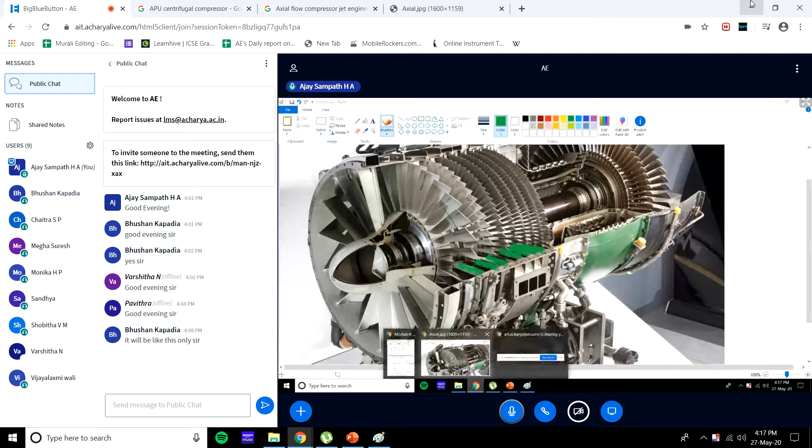So this is your rotor stages and this is your stator stages. Okay, so we'll see the working of it. This will be represented like this. I think I should have taken the image.

Okay, here again, so in this image, this is an isometric view, correct? But if you look at the front view of this image, it would be something like this. This will be your rotor stage, and then your stator stage. No, first one would be your stator stage, and then rotor, and then rotor, and then stator. Okay, we'll just take two for now, and then call it rotor and stator.

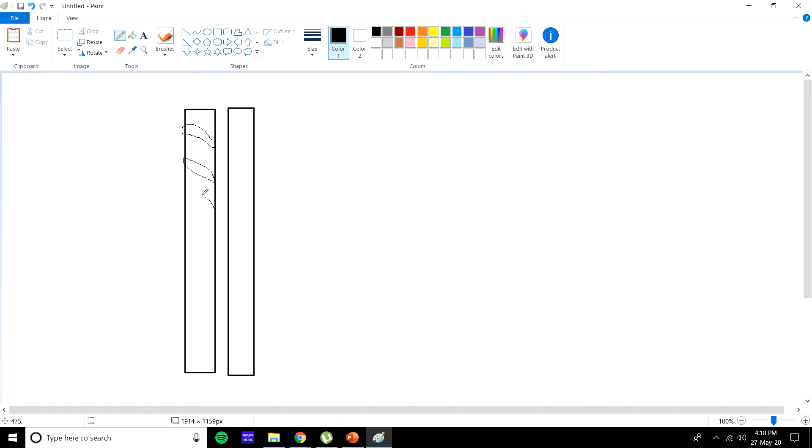And this is one blade. Some random drawing I'll do, just don't take it to be the exact one. Okay, so these are the blades. So blades are nothing but your airfoils, correct? So these are the rotor blades, and correspondingly you'll have your stator blades.

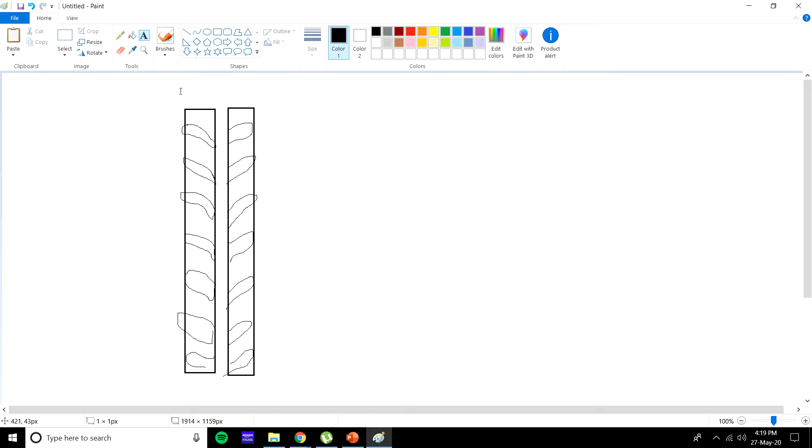So this image, if you look at from the front view, you'll see something like this, correct? So that will be your first stage, will be rotor, and your second stage will be stator. Okay, so rotor meaning it can rotate, and stator is stationary, it is not rotating, correct?

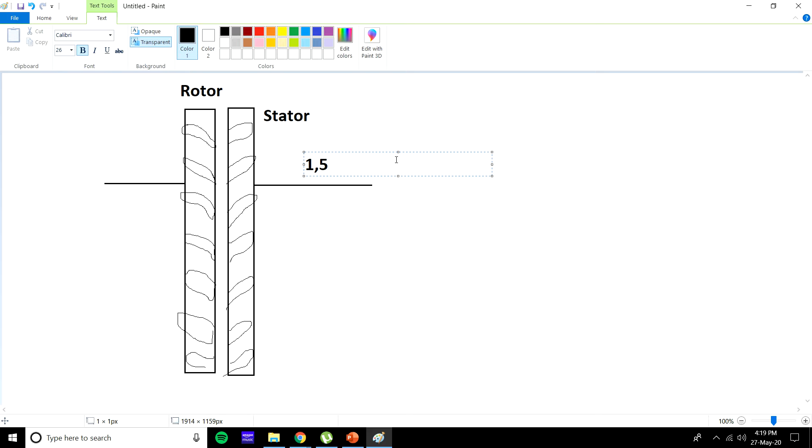So like this, for this one stage, when a gas is coming in this direction, or any fluid is coming in this direction and coming out from here, the maximum compression ratio you can have at these two points is 1.5. Okay, so similarly, if you multiply these stages like this, you can have n number of

casing, and that is why you have this many numbers. So this has got one stator blade and one rotor blade that will encompass as one compressor stage. So 1, 2, 3, 4, 5, 6, 7, 8 compression stages are there in this. Okay, so again 1.5 is quite generic.

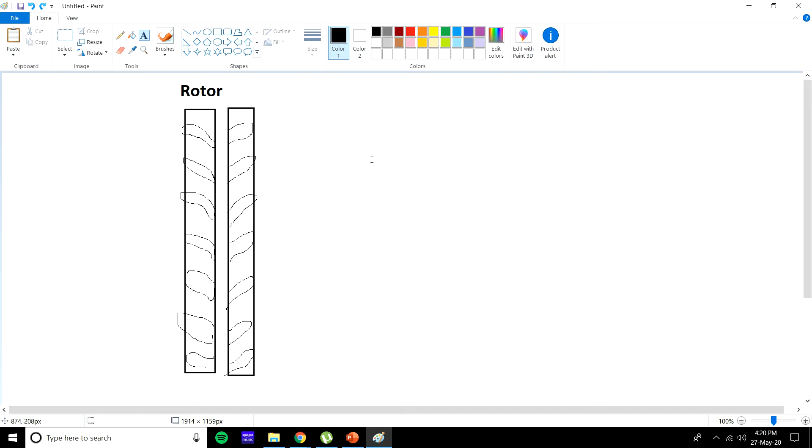I think right now, because of the technological advancement, this number could be more. Okay, but know that it is not much more than the centrifugal compressor, but it can be higher.

Okay, so now what is the idea behind this, or how does it compress, or how does this work? Let us see. So again the same thing what I've said so far. So rotor is attached on the shaft, and stator is actually attached on the engine casing.

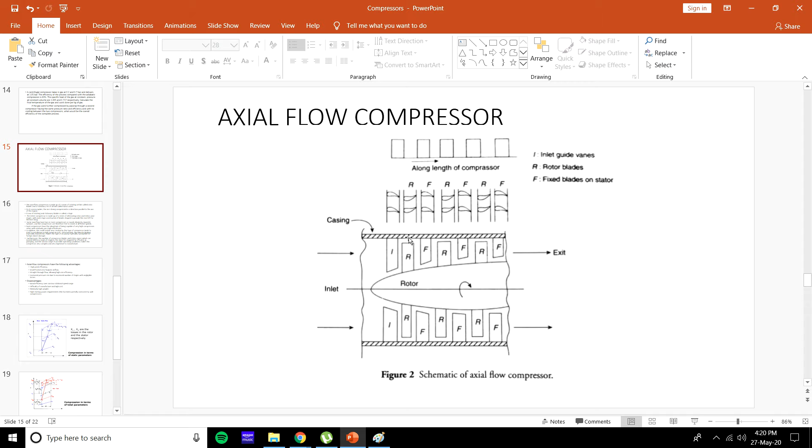Okay, from the front view you'll observe like this, and once you see the stages like this, whenever you see a blade like this from the front view, if you observe it aligned parallelly like this, you call it cascade blading.

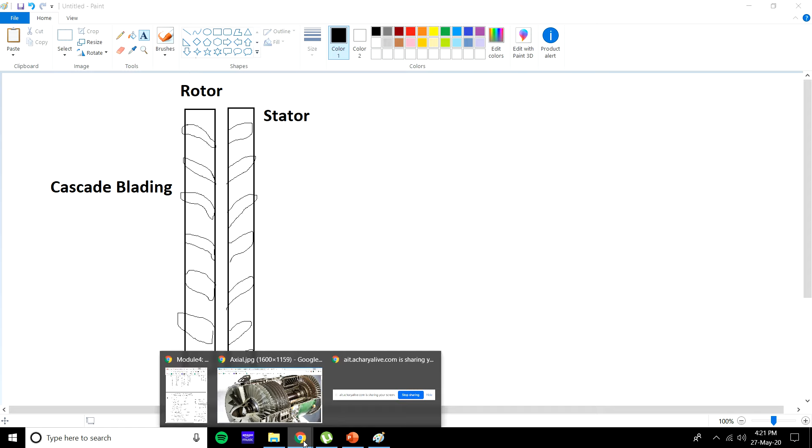Okay, very important word for you to understand. If you see an arrangement of blades in one column, in one such column like this, or one such column like this, you call this a cascade of blades. Okay, so probably if you see this one column, one section of it, if you remove, you call it cascade blading.

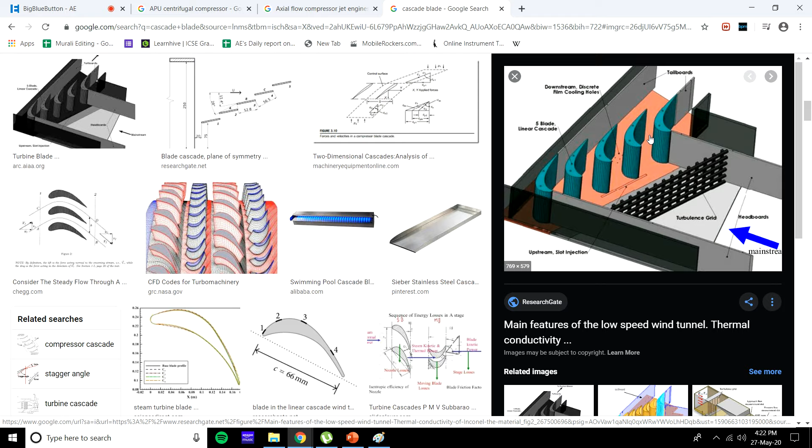This is like cascade blading. Why is this important? This is important because if at all you want to derive something, see, this is cascade blading. So if at all you want to derive something, let us say you want to derive what is the amount of lift that is being generated between these two blades, correct, and the overall lift.

So lift here is nothing but compression. Okay, if it was in air, it would have been giving lift. Since it is encompassed in one body, here it would be compression. So if you want to understand what is the amount of lift that is being generated, you can't calculate everything at once.

So what you do, you open the blade, that is, let us say if this is your circular axis, what you'll do, you'll cut this portion and elongate it. So if you open it, it will be like this. Therefore, now your blades will form a cascade like this.

So once it forms a cascade, you only do analysis on two such blades, this one blade and another blade. So it will be like this. Correct. So I think here, if you want to visualize, it would be something like this.

So something like this, if you open and keep it, you'll get what is known as a cascade. So when you want to analyze the overall effect or overall thrust or compression ratio that is being produced by this particular compressor, what you do is take two successive blades and then apply whatever equations, be it Bernoulli's, be it whatever lift equation or drag equation, whatever you want to do, or the physics behind it, you apply just to these two sections, and then you integrate it throughout the compressor.

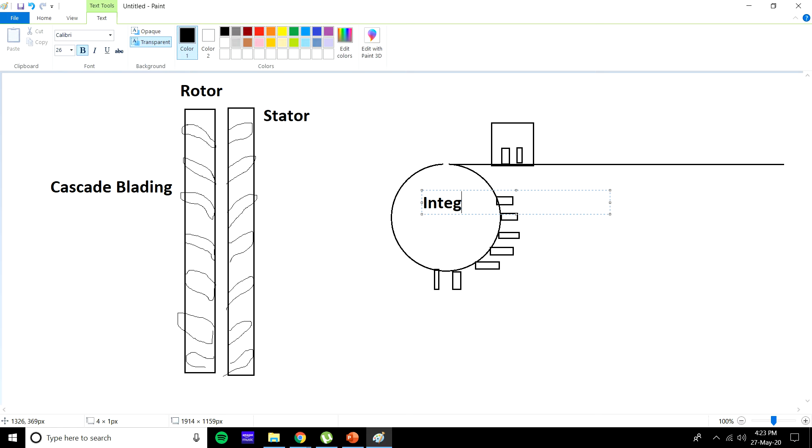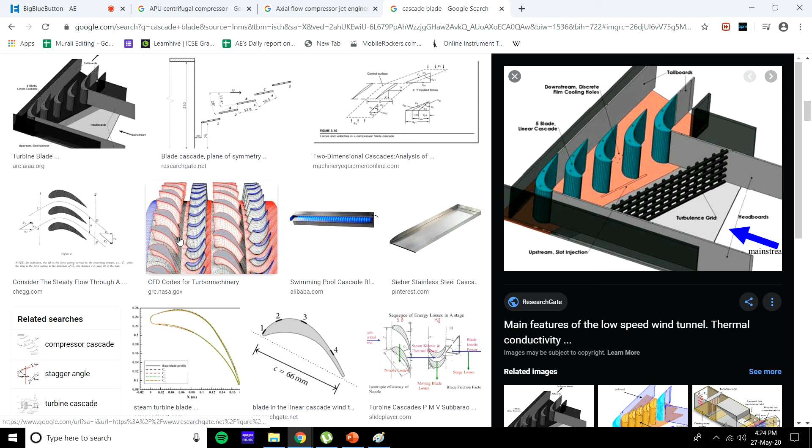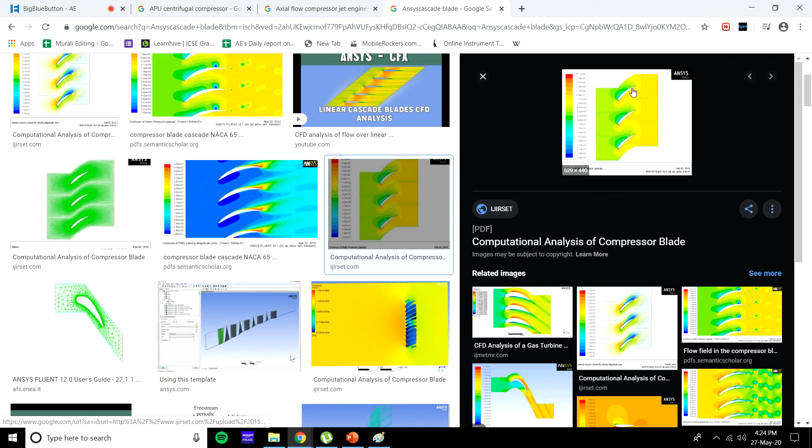So integrate it throughout the compressor. Whenever you're doing any analysis, like ANSYS or fluent analysis, you don't take the whole compressor itself because the calculation time and run time will increase. To avoid that, you just take one cascade. Let me show you, like cascade blading in ANSYS.

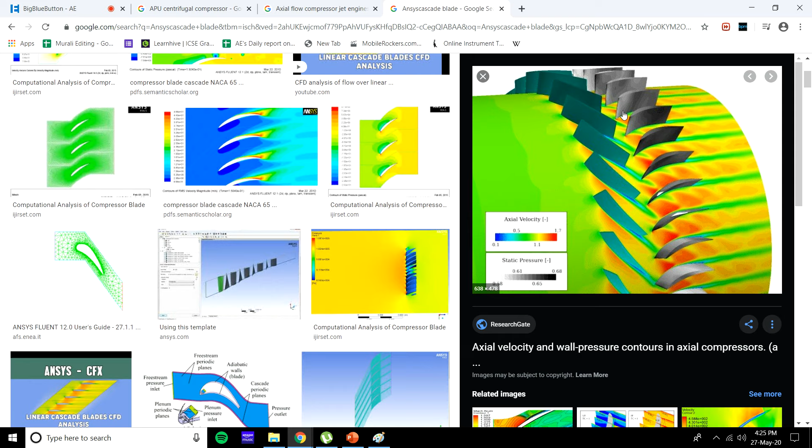So your whole compressor, you just limit it to a small portion and perform your analysis. This is flow analysis, where you can see where the lift is being generated, the velocity contours. Rather than doing this for the whole compressor, which takes a huge amount of time to calculate and obtain results, you take only a small portion of it, call it a cascade, define your geometry, and obtain the results. That's what you know as cascade.

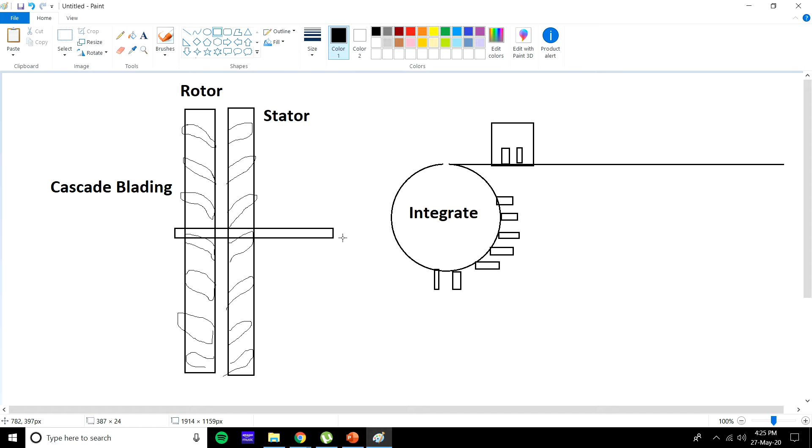Now let's see how exactly the compression is happening. The axial compressor is made up of a series of rotating airfoils such as rotor blades and stationary blades called stator vanes. As its name implies, the air is compressed in a direction parallel to the axis of the engine. The axis of the engine is the axis at which the shaft is located. So if the shaft is in this direction, the compression also takes place in this direction, and therefore you call it an axial compressor.

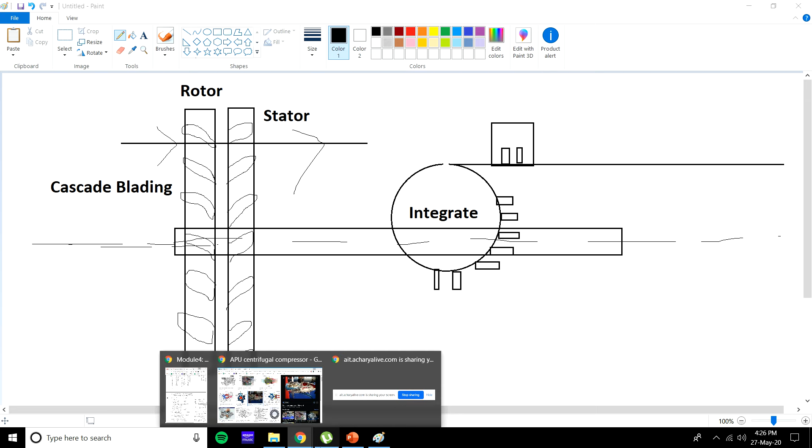This is the axis of the compressor, the central axis of the shaft and the overall engine. So if the compression takes place in this direction, you call it an axial flow compressor. The entire compressor is made up of a series of alternating rotors and stator vanes, which is stage-constructed. Some axial flow compressors have two or more compressors or a spool driven by separate turbines.

I've already discussed many times what a spool is. One set of compressor blades will have one set of turbine blades. So a rotor and stator will have one turbine - you call that one spool. And with multiple sets, you call them different spools. The compressors are therefore free to rotate at different speeds.

So when you have a spool, as we've discussed in class already, if you have another spool, there will be a shaft inside a shaft. Therefore the high speed shaft will rotate at higher speed, and by some gear mechanism, the lower turbine and lower compressor will rotate at different speeds.

In addition, the small frontal area created by this type of compressor leads to its installation in high speed aircraft. Unfortunately, this is the major drawback of axial flow compressors - the delicate blading, especially towards the rear, makes this type of air pump especially susceptible to foreign object damage. Because they rotate at very high speed and the force is axial, if a foreign object, say a small stone, hits the blade, it will be immediately damaged, and that damaged blade will cause a series of damage within the compressor and the engine itself.

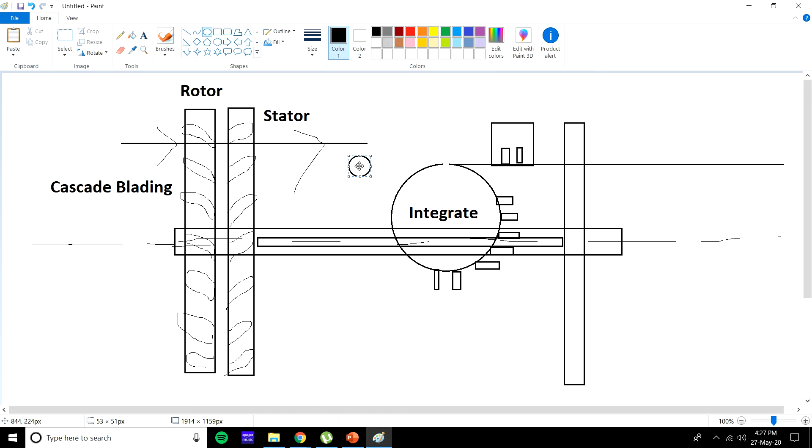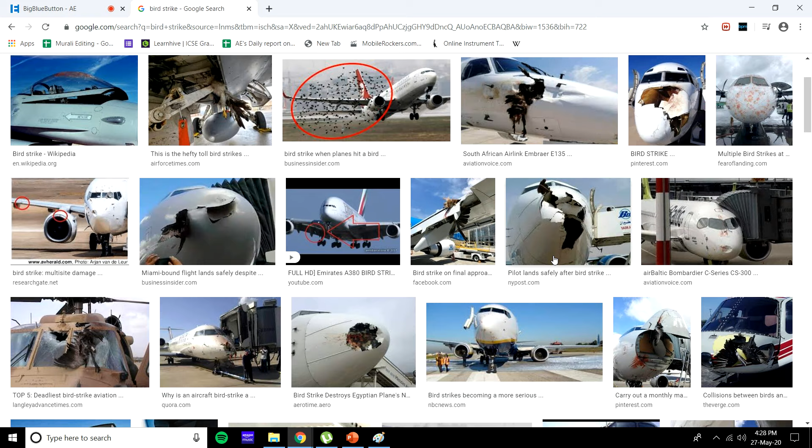Therefore there's a study called bird strike - I think you have heard of it. If you look at these images, it has occurred on some major portions. Importantly, bird strike is most vulnerable for engines. When engine failure occurs because of bird strike, this becomes another field of study especially done for axial flow compressors - birds flying into the engine.

I think there is a very good video also showing this. It's an incredible sight. Danger, literally. They cause... you can see here how the blades have been damaged. This is one of the major drawbacks in an axial flow compressor.

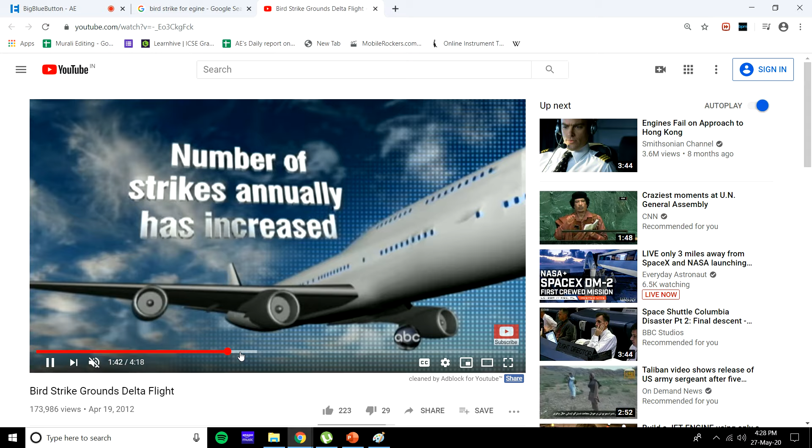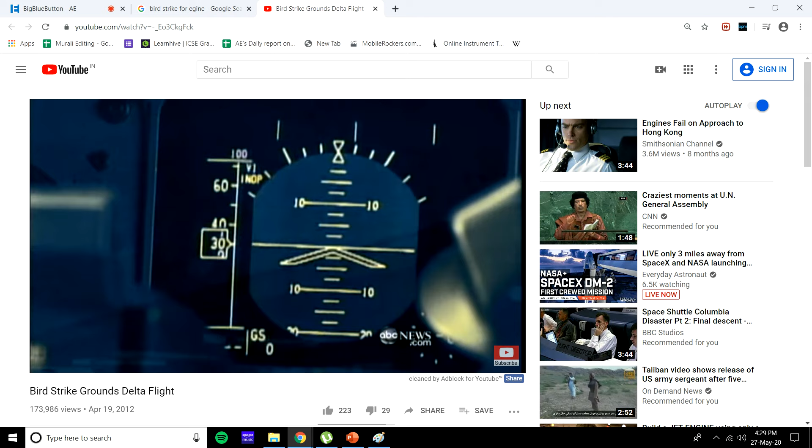While a centrifugal compressor can handle any foreign object, any sand particle or smaller stones going inside the compressor very easily. So if you look at your own hydraulic motor, the water motor you use, it's actually a centrifugal motor. Your water will not just be water - it will contain mud, sand particles, and other things too.

In spite of that, it does not face such severity because the direction it comes is not completely axial. In a centrifugal compressor, it comes axially and exits radially. Because of this configuration, foreign objects that come in will easily tend to move away from the blades rather than in between the blades. But in this case, it is not so, and it has to move through the blades. That is one of the major reasons.

I think one example we can see. These are some of the compilations. Let's see one. Okay, anyways, we'll leave it at that.

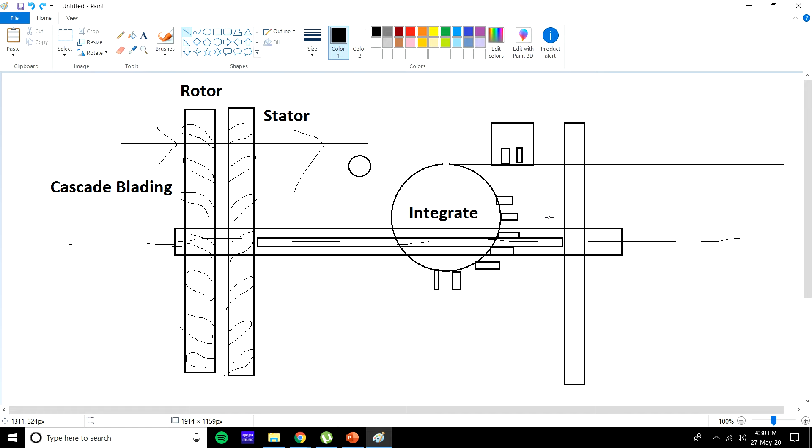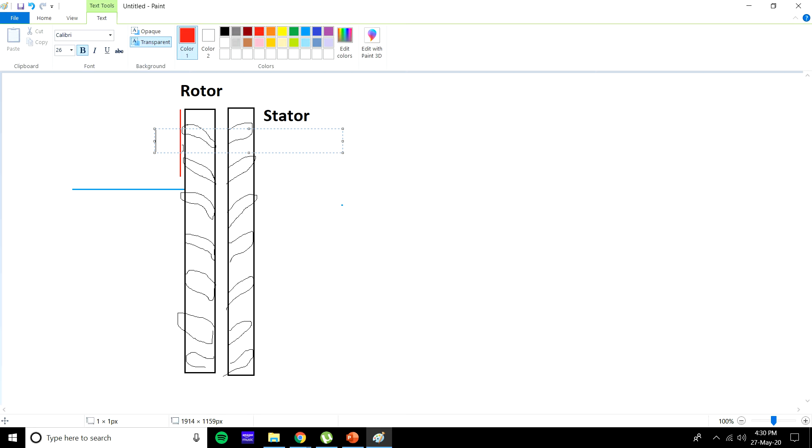So now, how exactly is the compression taking place? What happens is your fluid comes in at some velocity. Once it has come in at some velocity, your blade is moving at a velocity U. Since it is moving at velocity U, there is some work transfer occurring.

Since it is rotating on the stream of air, the rotor will add work, dW. The rotor will add energy to the stream of air. So what will happen is there is an increase in kinetic energy for the stream. This kinetic energy is being added, so once it comes out, it will come out at a much higher velocity.

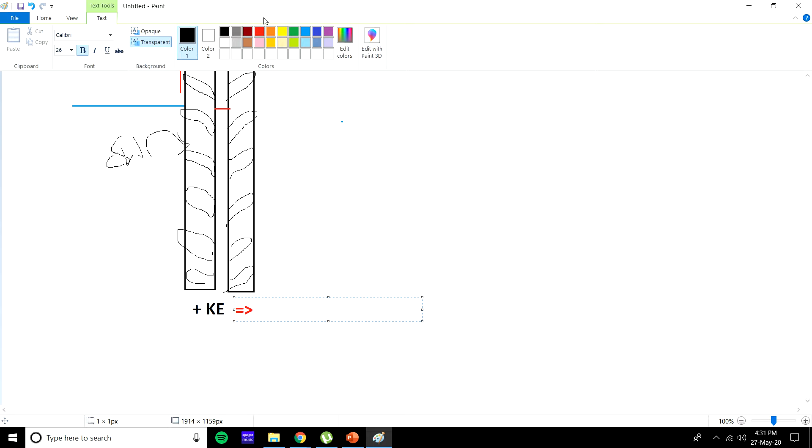But what does a stator do? A stator will convert this kinetic energy to static energy, or static pressure. I think the better word could be pressure head, or head pressure. So the idea is simple: the rotor adds kinetic energy, and the stator converts that kinetic energy into static pressure.

So once it comes out of this, it will now be at a lower velocity but at a higher pressure. The same thing happens in all of the stages, and thereby your pressure keeps increasing.

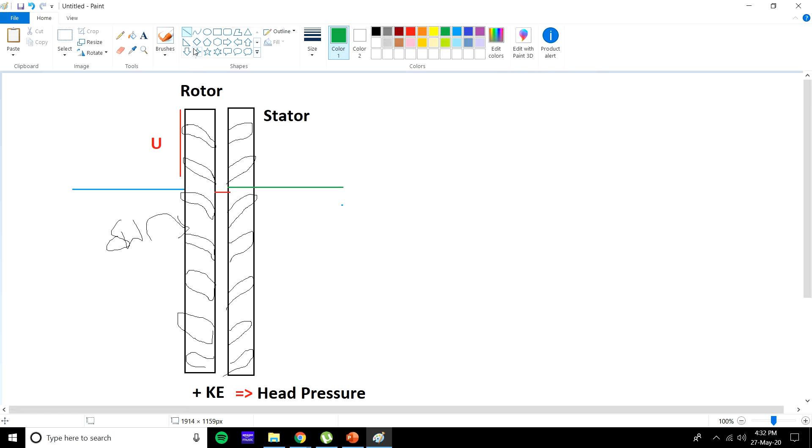So one may question, why just have a stator and rotor only? If I have a rotor stage, just a series of rotors like this, know this: only the rotor is adding work. The stator is not doing anything; it is simply acting like a diffuser, converting the velocity into static head or static pressure.

So if you have a series of rotors like this, you may expect the velocity to increase, and it must increase ideally. But the drawback is that since the rotors are rotating, there is vorticity or vortex. So the flow will not be linear; it will induce huge turbulence within the rotors. If you don't have a stator stage, velocity will increase, but the vorticity or turbulence will be very huge.

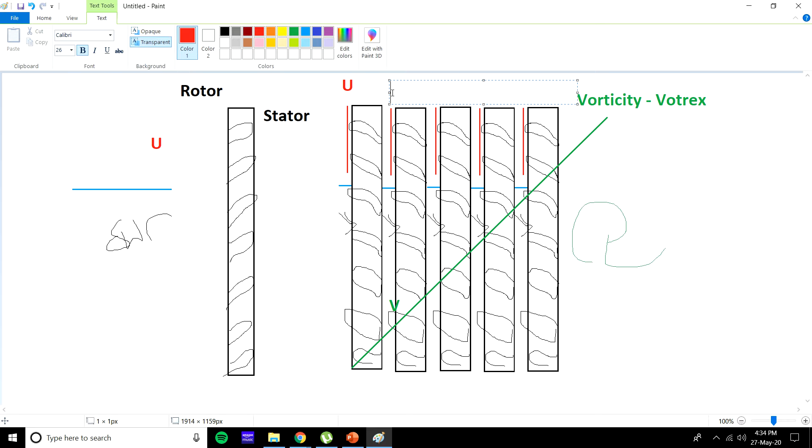And since the velocity is huge now, this is your absolute velocity, correct? So if the green line is your absolute velocity V, and the red line is your velocity of the blade U - let's say U1, U2, and so on. If you have this, given V and U, like I said last time, the third vector between U and V is your relative velocity.

So that relative velocity will be very huge, and controlling that system is also very tough. One second, let me just draw this. So this is for the overall rotor stage - this is your V, this is your U, and this is your relative velocity VR.

So what happens is, even though your absolute velocity is increasing, because of the vorticity and the blade velocity, your VR also increases. If you have VR increasing, that means your V will decrease - your absolute velocity is decreasing and your relative velocity is increasing. If your relative velocity is increasing, that is of no use to you. You have to keep your relative velocity minimum - if this line is only about so much, automatically your green line will increase in its length.

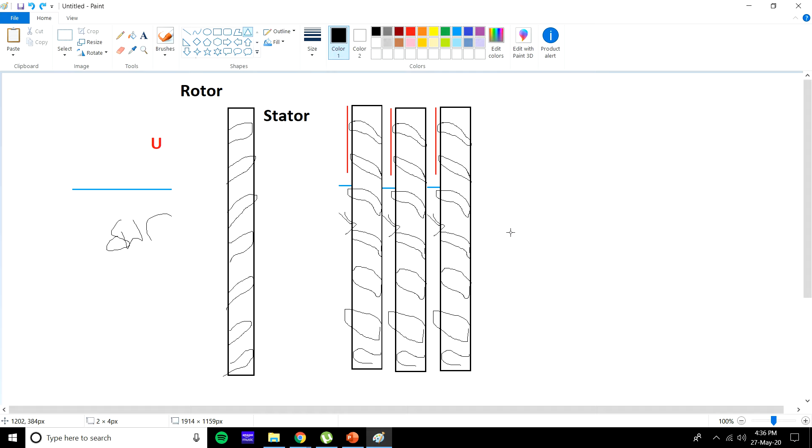I can't show you the variation exactly, but it will be something like this - like a triangle. So if one component is increasing, the other will decrease; that is how it works. So therefore, just by having the rotors, you can't run it, and also the adverse kinetic energy on the blade will have an impact on the overall system. Therefore, it is mandatory to have a rotor and stator system for an axial flow compressor.

So we'll see some of the advantages and disadvantages. Axial flow compressors have the following advantages: high peak efficiency. Compared to your centrifugal compressor, the efficiency of an axial flow compressor is very good, and small frontal area for a given airflow, which we already discussed.

And straight through flow allowing high ram efficiency, since the flow is always axial, unlike your centrifugal, where it enters axially and exits radially. Since that is missing, you'll also make use of ram efficiency. Ram efficiency is striking directly on the blade or striking within the component. So once it is coming inside, ram efficiency is nothing but your external and internal compression. In external compression, because of the geometry of the compressor itself, there is some compression going on other than the compression happening in the blade. So that is ram compression.

And then increased pressure ratio due to increased number of stages with negligible losses. If you take it overall, it is actually very good, but the disadvantage is good efficiency over narrow rotational speed ranges, meaning to have very good efficiency, you'll have to operate it at one particular rotational speed. Unlike your centrifugal compressor which can operate in any other range, it is not the case here. To have perfect maximum efficiency, the rotation of the shaft should be constant.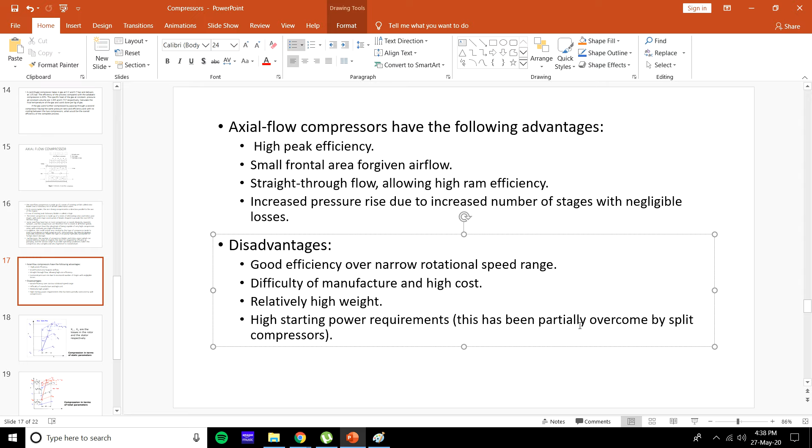High power starting requirements, correct. Since all of the blades should start compressing, to start it you'll have to use some mechanism, some power source which can generate an equal amount of compression, therefore high starting power requirements.

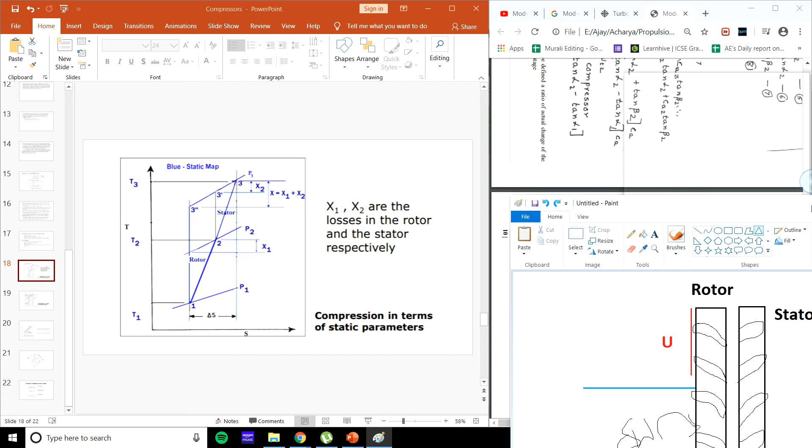Okay, so now we'll see the TS diagram for this. Let this be here, and I'll still draw on your... okay, so first we'll only see...

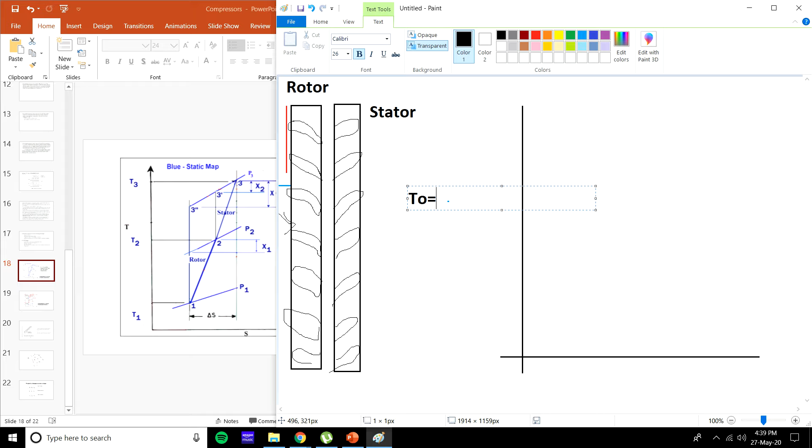The static TS diagram is stating, keeping only static terms, that is your T1, P1. Any equation will follow something called the total. Even in terms of temperature, total temperature or stagnation temperature will be equal to static temperature plus, in case of temperature, the velocity term, absolute velocity, so that will be V squared divided by 2Cp. This will define your temperature. Your pressure will be like this: static pressure plus the dynamic pressure, half rho V squared.

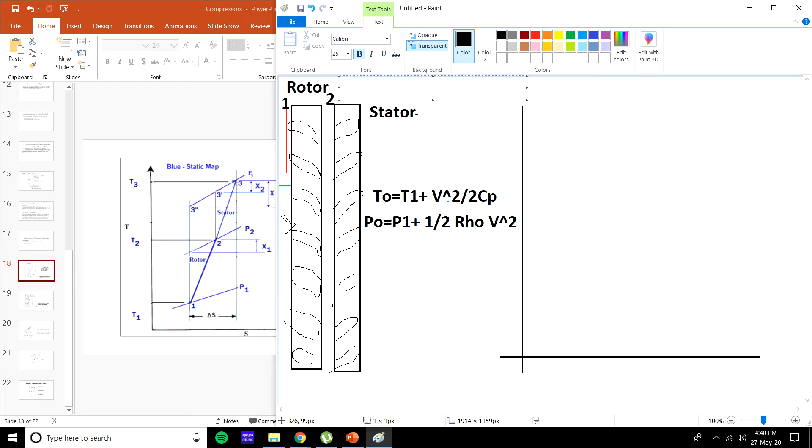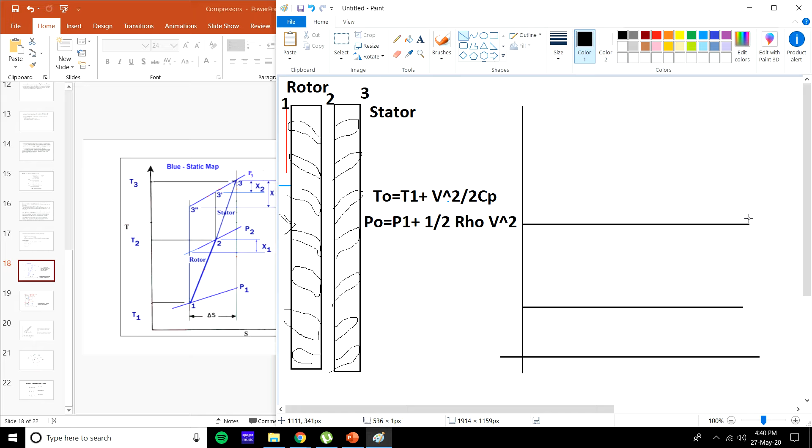Okay, so we'll only plot for static first. So you have 3 stages. Your stage 1 will be here before entering the rotor, stage 2 is here, and stage 3 is here. In all of these 3 stages, correspondingly you'll have 3 temperatures: T1, T2 and T3.

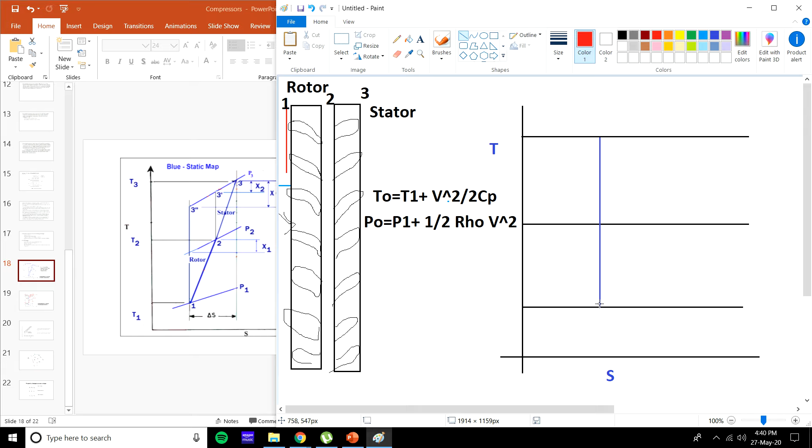So ideal efficiency, ideal compression, isentropic compression will be a very straight line like this from 1 to 2. This is T and this is S. But it is not ideal, therefore actual compression will be like this, from 1 to 2, and then from 2 to 3. The corresponding pressure you measure will be like this: this will be P1, this will be P2, and this will be P3.

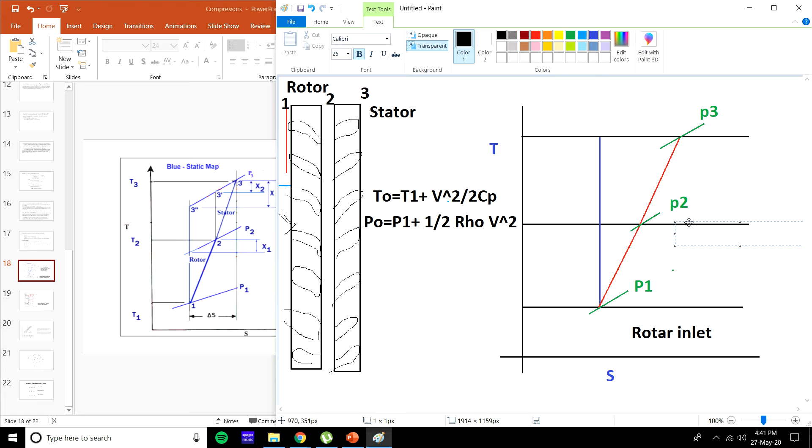So from here, this is rotor inlet, here it is rotor outlet as well as stator inlet, and at this stage you call it stator outlet. This is just your static condition.

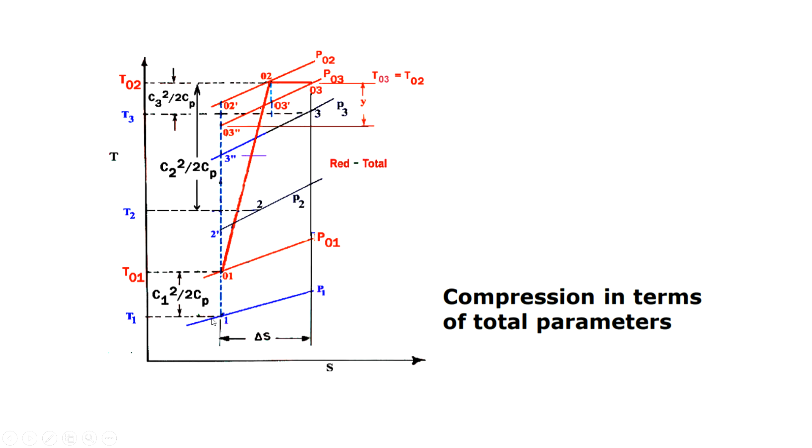With static conditions, if you extend these lines to meet at this point, you'll have your stagnation pressure, and this line you'll have your stagnation pressure here, and the corresponding stagnation pressure. So then we'll see the stagnation pressure itself. If you see, red here is the stagnation point, that is total pressure and total temperature, and blue is your static pressure. So from T1 to T01, that is nothing but here.

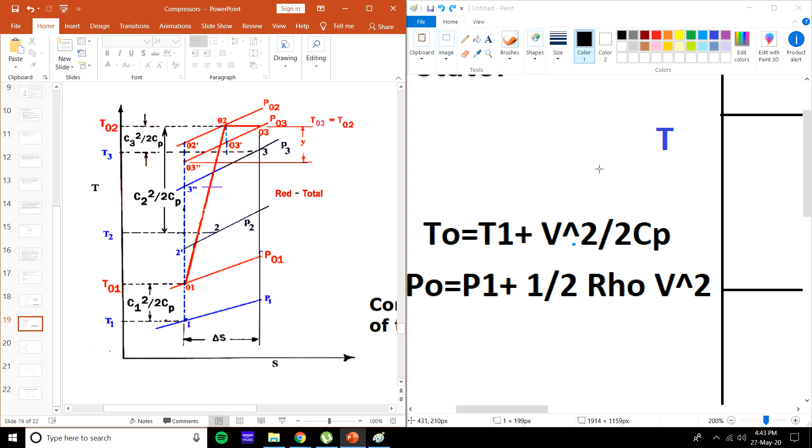From here to the next temperature T02, the overall, so T02. So why T02 and not T03? I'll let you know. So from T01 to T02, from this stage, from here to here, you'll achieve a stagnation pressure temperature of T02, correct? But T02 is equal to T03. The stagnation temperature of T02 and T03 is same. Why? Because there is no heat addition taking place in the stator system.

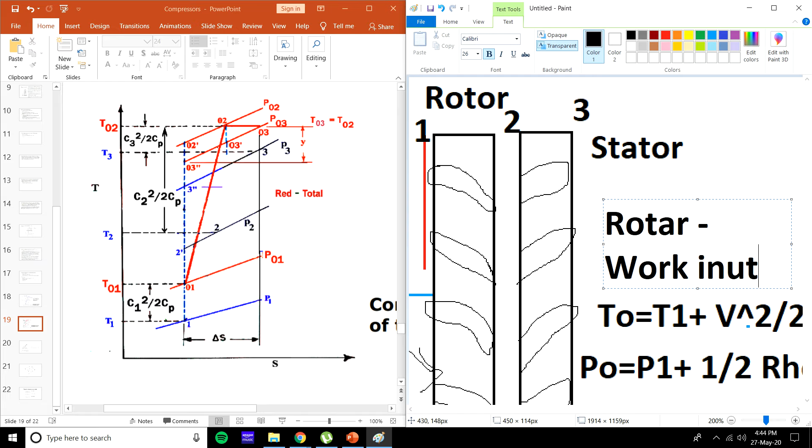Heat addition as in, like I said, you have some amount of work input in your rotor, correct? Rotor has work input. So if rotor is having work input, meaning there is increase in pressure. As a consequence of increase in pressure, there is increase in temperature, but you're not directly adding any heat to it. So therefore it is still adiabatic process and still increasing temperature.

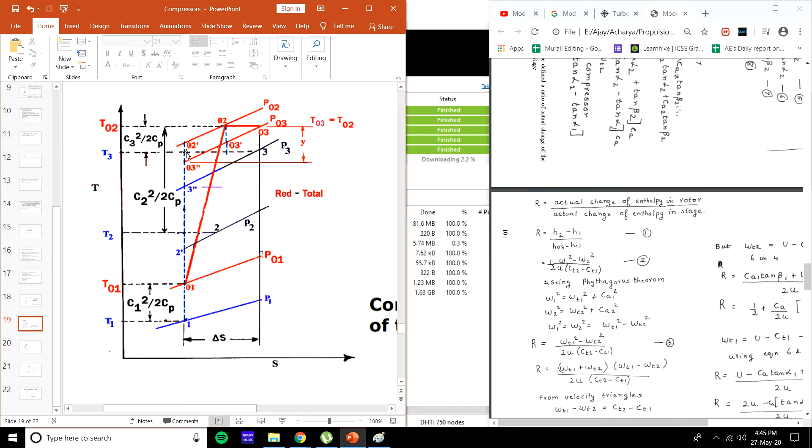But in stator, the process is adiabatic, but you're not adding any work or removing any work. You're just doing the action of diffusion. Therefore, the temperature whatever you achieve at the end of rotor will be the same stagnation temperature at the stator. Will be the same stagnation temperature, but the actual measurable temperature is not the stagnation temperature. It is actually at the exit T2, and furthermore it is T3. So this is just variation of pressure.

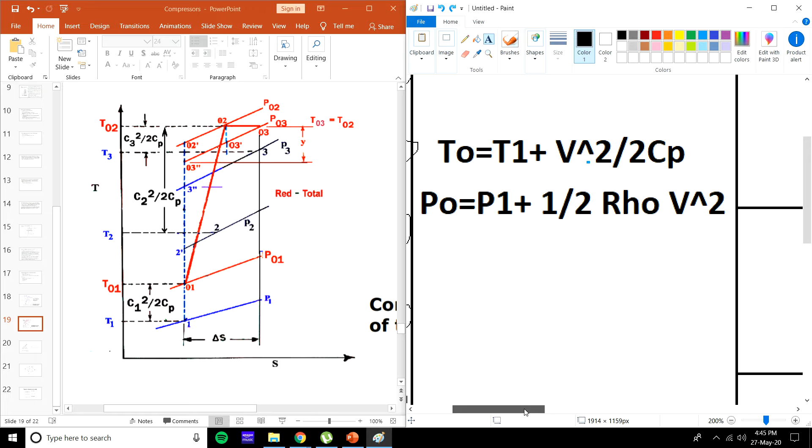Where did that go? Okay, so one thing, for you guys to be able to understand what is actually going on here, if you know these two equations and the significance of P1, T1, and T0 and P0, you can easily understand this graph. Hope you understood. Any doubts?

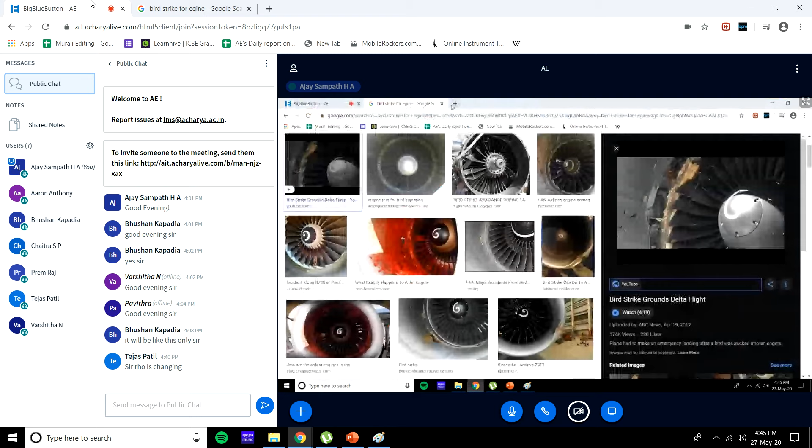So rho is changing. Where, Tejas? No, I mean, like, what do you mean? Absolutely, rho is changing. Oh, you're saying here half rho v square. So what will happen to this? Correct, I think that is your question. So half rho v square.

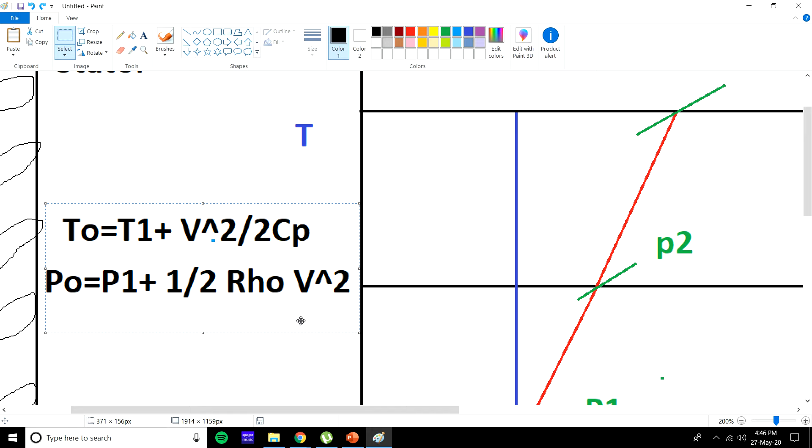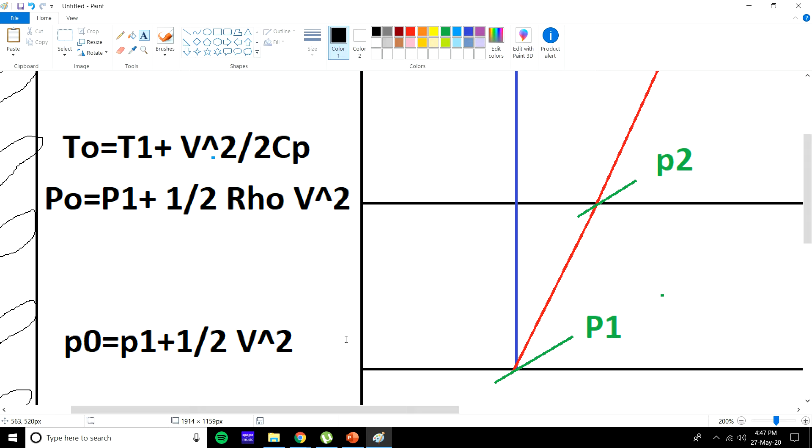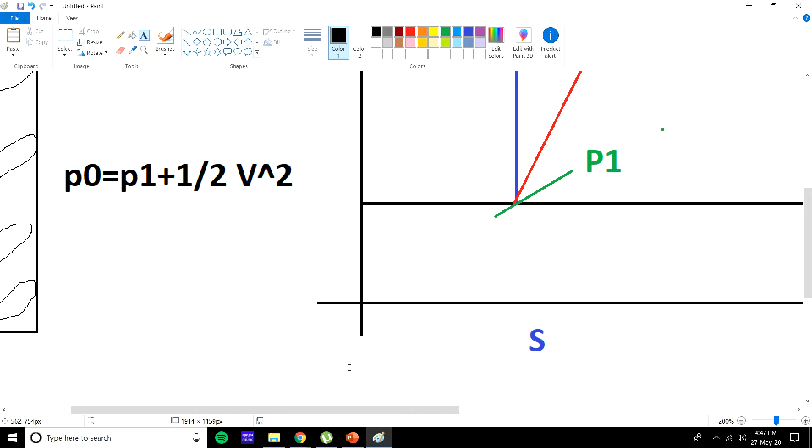Yes, flow is compressible, but the one habit that I have most of the times is that these equations are actually not the direct pressure but specific. So it's not capital P, it is P0 is equal to P1 plus half V square. So one mistake or one habit that I have is not to see it as specific. I have my own reasons, but in all of the cases, even though it is a compressible flow, you take the specific equation. So it is specific pressure. Therefore, the mass quantity will be taken for per unit volume. So when you take that per unit volume, the rho, even though it is compressible, you'll be speaking in terms of specific. So therefore, there is no much change in here.

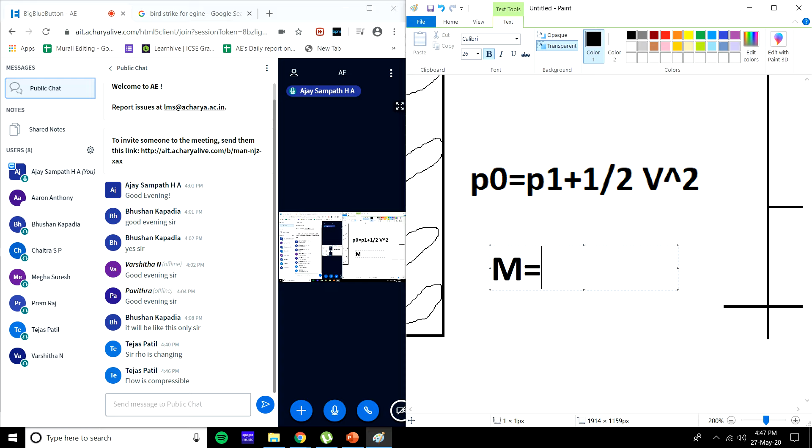But the actual change that happens is when the velocity, or Mach, is crossing Mach 1. So when it is crossing Mach 1, remember your diffuser also. Let us take the case of just considering this to be a diffuser. Even in your diffuser, the equations will follow. I mean, it is agreeable - the general equations what you follow, and the graph variations are agreeable as far as the inlet Mach velocity is less than 1 and outlet Mach velocity which cannot exceed 1. So with this condition, within this limit, your equations or your graphs will follow a common pattern.

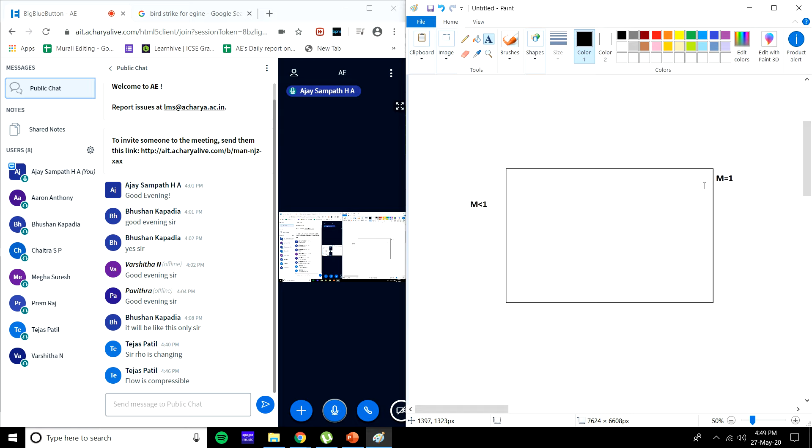Once this limit is crossed, even though the flow is compressible, all other parameters come into picture only when it is crossing Mach 1. So even though the flow is compressible, you'll be speaking in terms of specific pressure or specific temperature, which you don't dig around, but it is understood - you're reading it in terms of specific. So when you take it in terms of specific, your mass term will be divided out of it. Therefore, density will not play a crucial role up until the point where Mach is greater than 1. I hope you understood what I was trying to tell.

Okay, so this is specific. Therefore, rho is not there when you are doing it for specific.

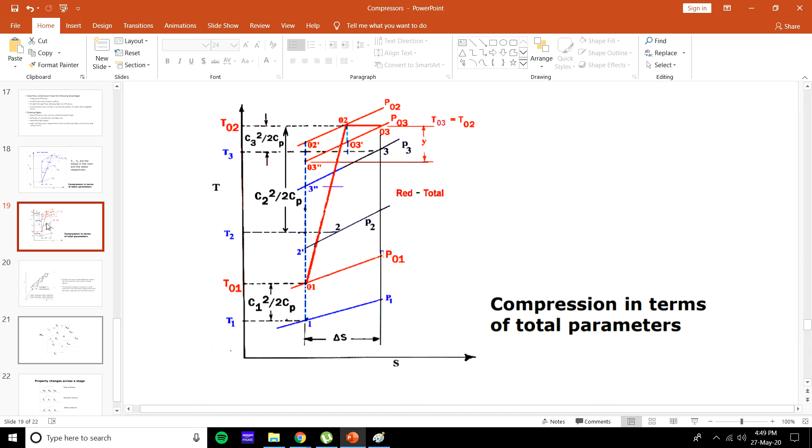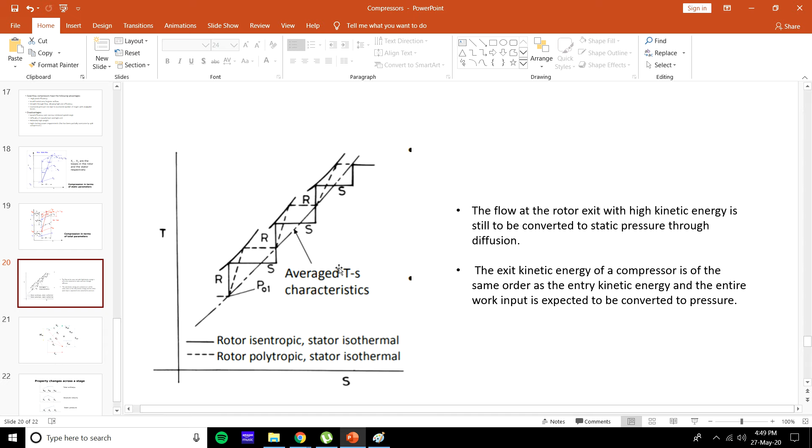Now we'll see what is happening to the successive stages. This is for just one stage while it is passing from rotor to stator. So for one stage we have drawn the TS diagram, but if you look for multiple stages, ideally speaking, it is all isentropic.

A thick line is an isentropic line. So the first stage in the rotor is isentropic, therefore it is a straight line, and then this is acting like a diffuser, so therefore no increase in temperature but increase in entropy. Then isentropic again, therefore increase in temperature, and in the stator stage, no heat addition and no temperature change. So therefore temperature is zero, but entropy is not zero. This is how it goes on the multiple stage level.

But since it is not an ideal case, the rotor will follow a polytropic line, an adiabatic process. Rather than polytropic, you can just say it's an adiabatic process. So in an adiabatic process, the line will be slanted, but the stator is still isothermal, so it will go like this. The increase in temperature corresponds to the increase in pressure. So therefore in this graph you can easily plot it.

So if you draw these tangents, what they are trying to draw are the pressure points they are trying to mark. So in all of these cases, if you take an average temperature line, this line is an average temperature characteristic. An average temperature across the compressor in any of the different stages can be known if you draw an average line.

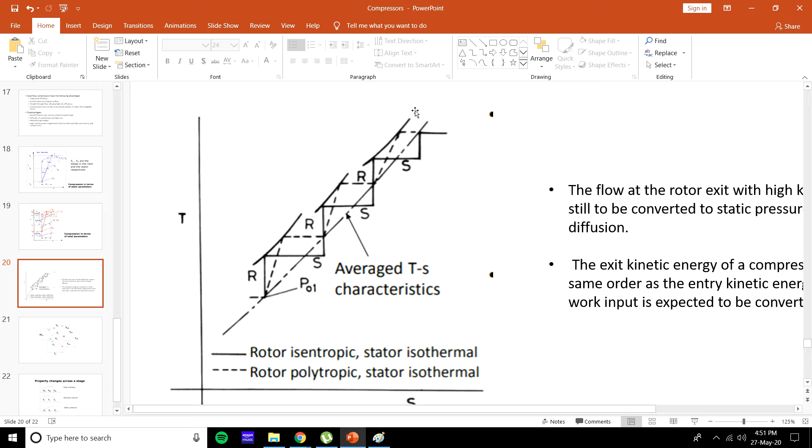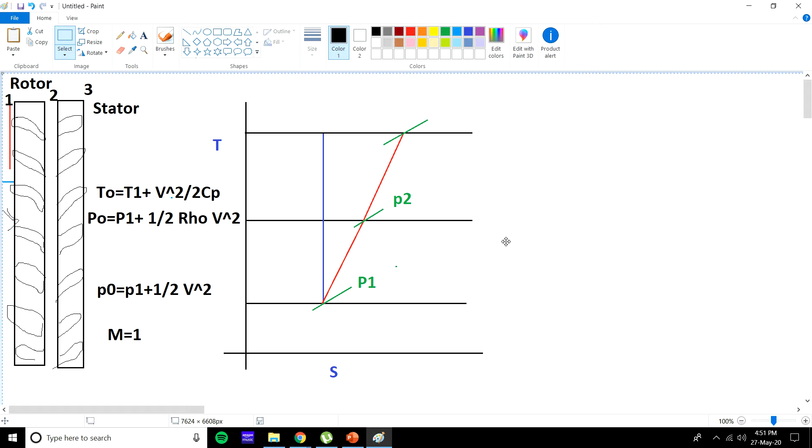Now we'll get into the velocity triangle. I'll draw it here. So we'll take the angle at which your absolute velocity is first. For this case, for your understanding, I'll just draw it like this. So your air will enter the system with an absolute velocity v1.

I'll draw the angle later on, and then it will meet your u, correct? So air is entering the system with v1 at a certain angle alpha, and then it will face the rotor velocity u. There is no u1 and u2 here because at inlet and outlet it is the same velocity. Why? Because the blade is not increasing in length, it is the same, on a common cascade, so therefore u1 and u2 on both sides will still be the same, so you can only represent it as u.

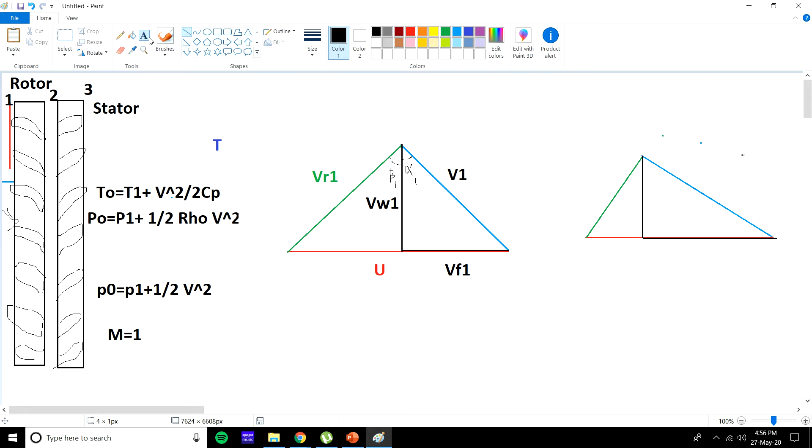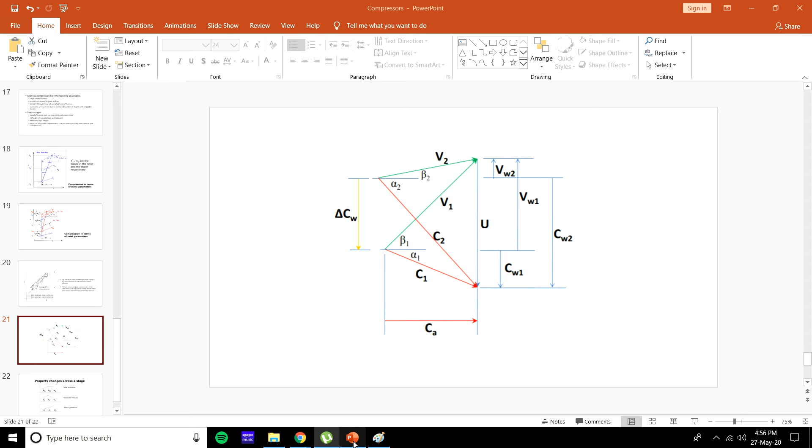So if you actually look at this, they both look somewhat similar, and also your u is the same, u1 equals u2 at inlet and outlet is u. So if you combine both of these in a single graph, you'll get something like this. Since u is the same, I'll just try to replicate it here, but the direction of velocities is different, the way it is entering and the way it is going out is different. So if I draw it in one single triangle, this is your u, I'll just take a bit thicker line.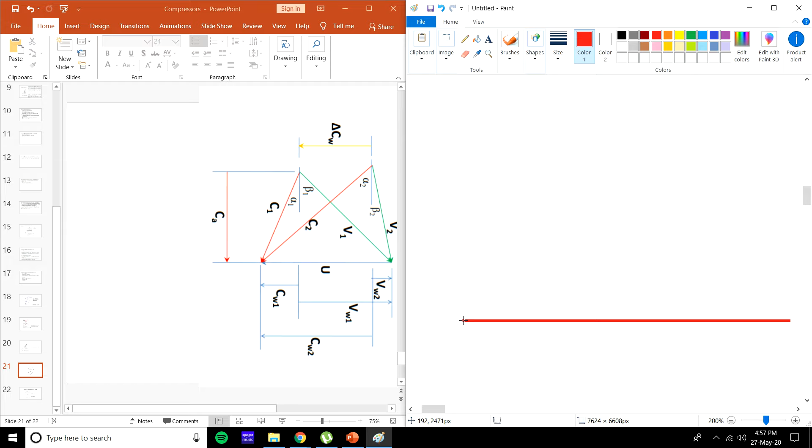So if this is your u, firstly you should have your absolute velocity. So with respect to this picture, absolute velocity c1 or v1 will be like this, and the other absolute velocity, c2, is here. And the relative velocity to these two is like this, here and here.

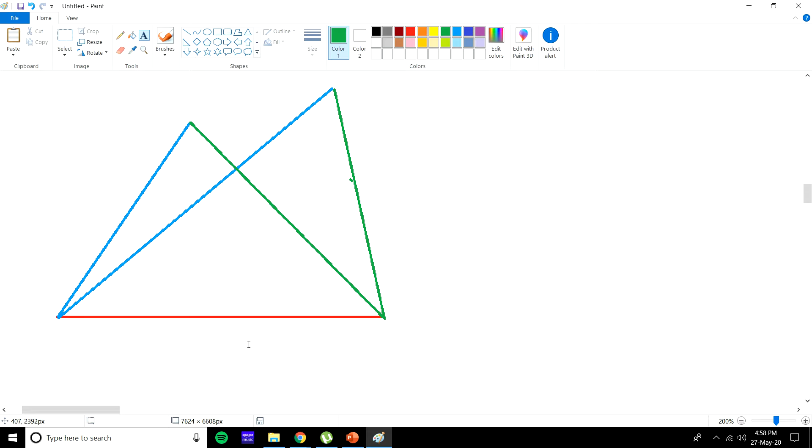So this is your combination of both inlet and outlet triangles. This will be your u, which is in red, and this will be your c1, that is your v1, and the blue line is your v2. This is your vr1, and this is your vr2.

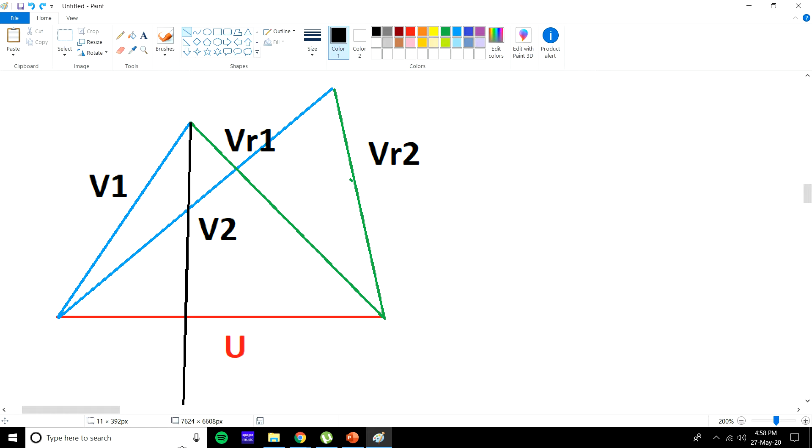So once you have drawn this line, you need not draw your tangential and radial velocity, because you'll have too much to take care of. So what you do, you just draw one line here, and two lines here, and here.

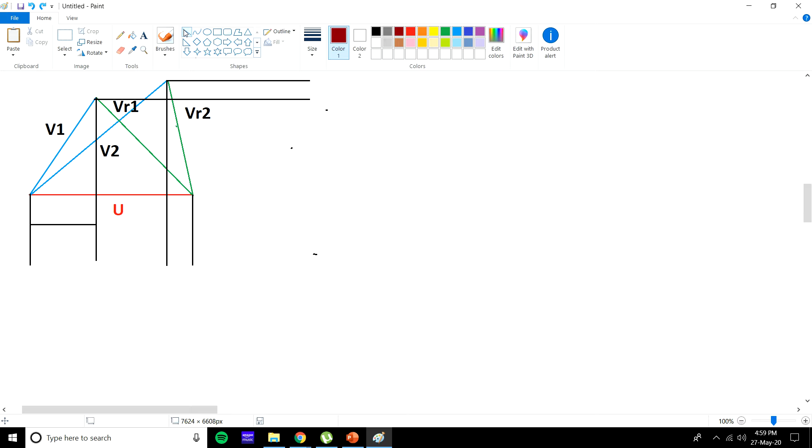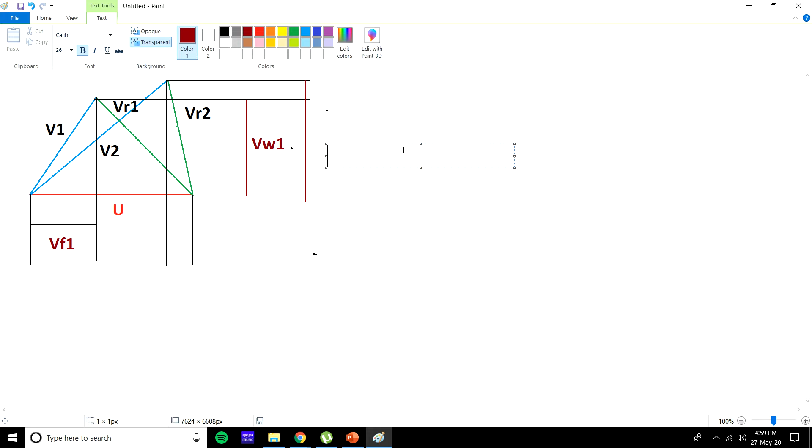So from this point to this point is your VF1, because V1 and VF1, and this height from here to here is your VW1, and similarly this height to this height is your VW2, and correspondingly from here to here is your VF2.

If it is confusing, you can separate them out like how I did here in the first place. Since U is common, you're just trying to draw it on the same thing to save time, or else you can just leave it at this point and then you know what is the horizontal length. This is most important from your turbomachine's point of view, to find the other angles.

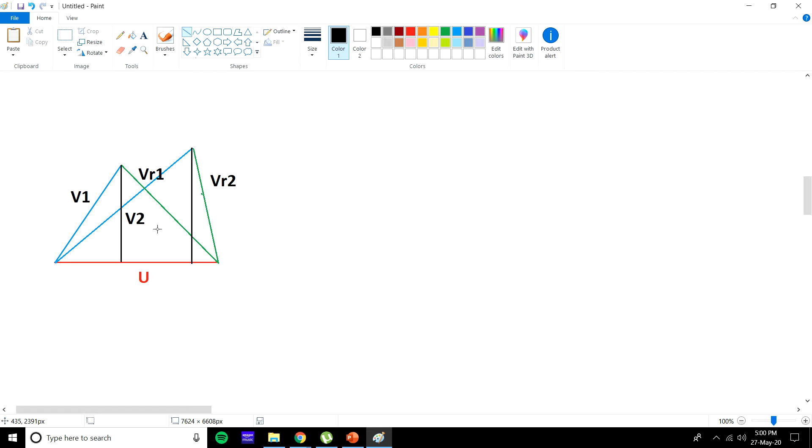So if you just draw it like this, and you mark your alpha 1, alpha 2, beta 1 and beta 2, it will become simpler because R and W is understood. The same thing. So hope you got the inlet triangle and outlet triangle.

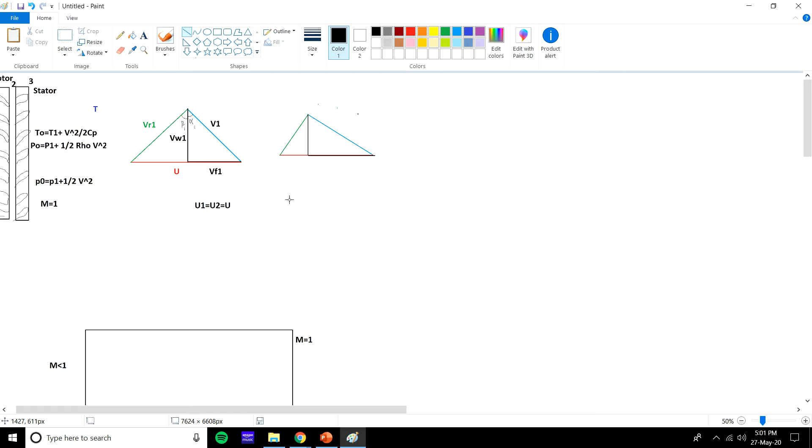So in the outlet triangle, once it is coming out, the stator system is not rotating, so the inlet to stator will be your V2. So this will be your inlet to stator: V2, VR2, VW2, and then U, and then VF2. So this triangle is at this portion and this triangle is at this portion, and that is also equal to the velocity triangle at the inlet of the stator.

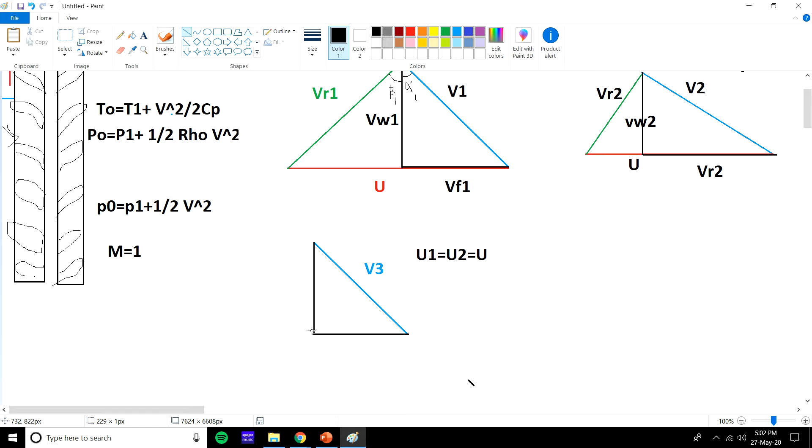So this will only have VW3 and V3, and then alpha. Why? Because the stator is not moving, therefore u is missing. So when u becomes 0, the resultant will also become 0. The only remaining portion is these two.

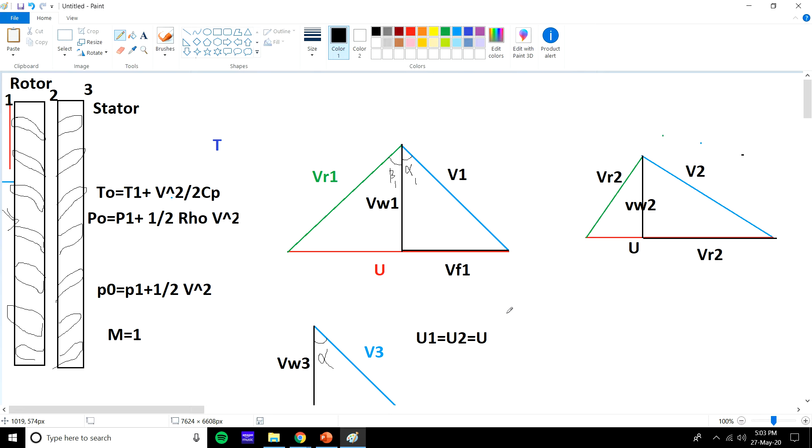So therefore you have 3 triangles in an axial flow compressor because of 2 stages: one at the inlet of the rotor, given by this; exit of the rotor, which is also equal to the inlet of the stator, given by this; and at the exit of the stator you have this. Because it is not rotating at any velocity u, u is completely absent. You have a certain absolute velocity v3, and for that absolute velocity you have the corresponding tangential velocity and radial velocity.

I think we can stop at this point, and then we'll continue tomorrow. There are some derivations. I think all of this is quite repeating to you guys, if I'm not wrong—correct, is it quite repeating from turbo machines? Or I would like to see it as a revision, so that you're able to revise it or get better clarity. If 2 people are teaching the same concept again, you'll have a different perspective to it, or a different way of understanding it better. So I like to see it like that.

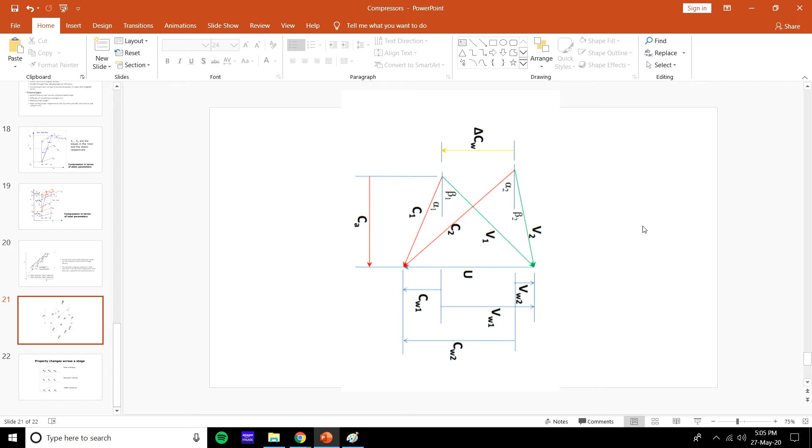So hope you understood the velocity triangles, and tomorrow we'll see some few derivations associated with it. Once we complete those derivations, we can directly get into problems. So tomorrow and the day after we'll complete this module, and then we'll only have turbines to deal with. So probably that is about another 3 classes. Once we get it done, your propulsion is over, unless you want me to repeat anything specific.